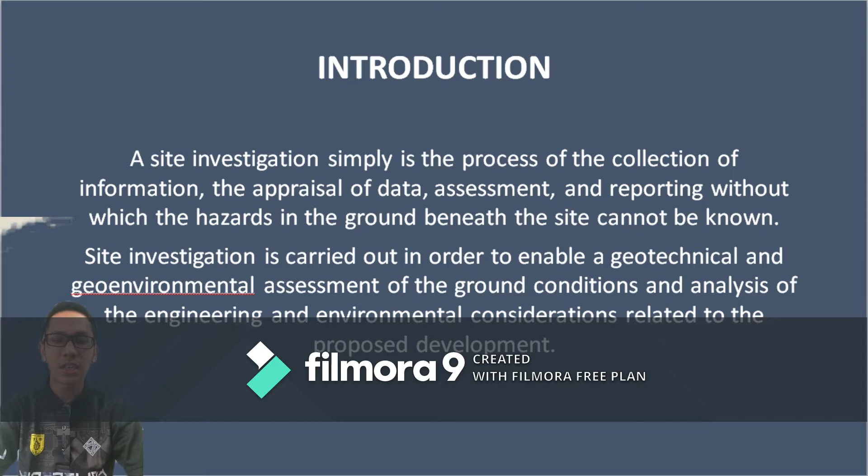Next, the objectives of site investigation: first, to know about the order of occurrence of soil and rock strata.

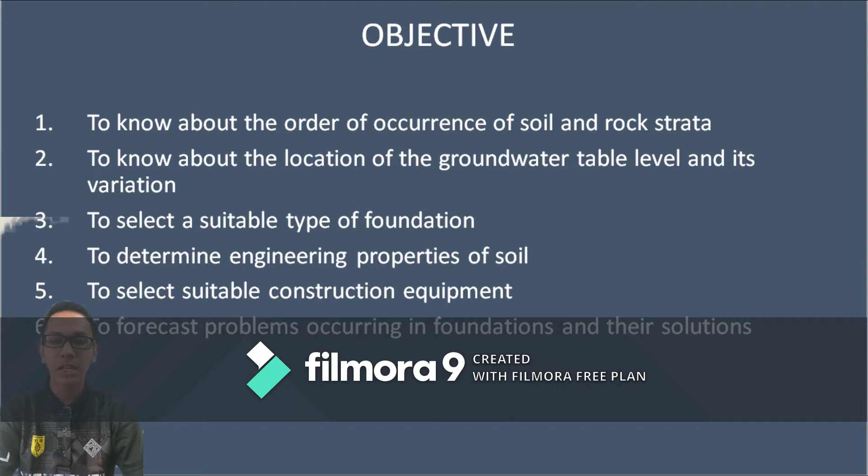I will present about work procedure. Number 1 is the desk study stage.

The methods involved are the collection and analysis of existing information data such as geological maps and land surveys, mining records, mains records, meteorological reports, groundwater records, area plan records, land survey records of nearby areas, and so on. That's for number 1.

Number 2 is site reconnaissance, also known as site inspection. It is a preliminary investigation on site and in the environment to find out in general the condition of the site.

The important information that needs to be known at this stage is the condition of the contour surface of the site, whether it is flat, sloped, and so on. This allows the estimate of the earthworks involved to be known, as well as the type of surface soil and its condition, whether there are cracks in the soil, holes, and so on, to allow us to know the soil problems that exist.

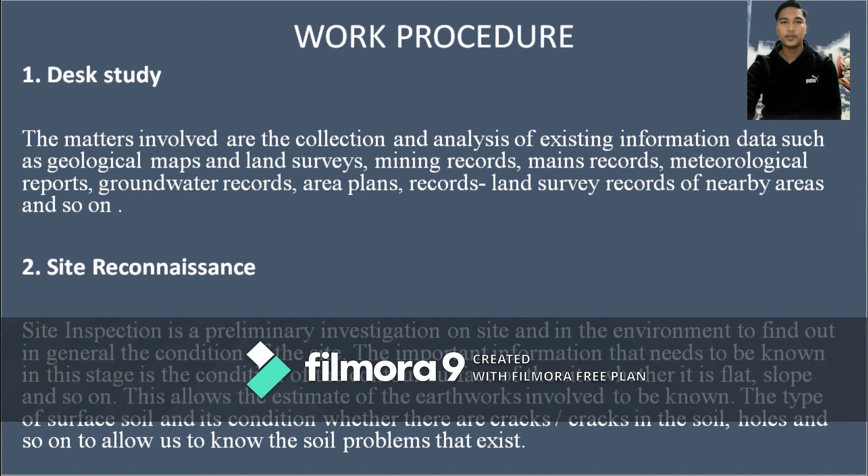Number 3 is spatial and detailed study. Detailed inspection and study is the stage where all the general data obtained at the external study site and site inspection are reviewed in detail for the purpose of design and construction of the project.

The things involved in this stage are topographical surveys, hydrographic surveys, and soil investigation. And last, for the work procedure, is field test or in-situ test.

Tests carried out on the site either prior to or during the construction process. Ground tests such as shear vane, standard penetration, cone penetration, plate bearing, pressuremeter, and structure loading tests such as tests on piles, proof loading, and displacement observation.

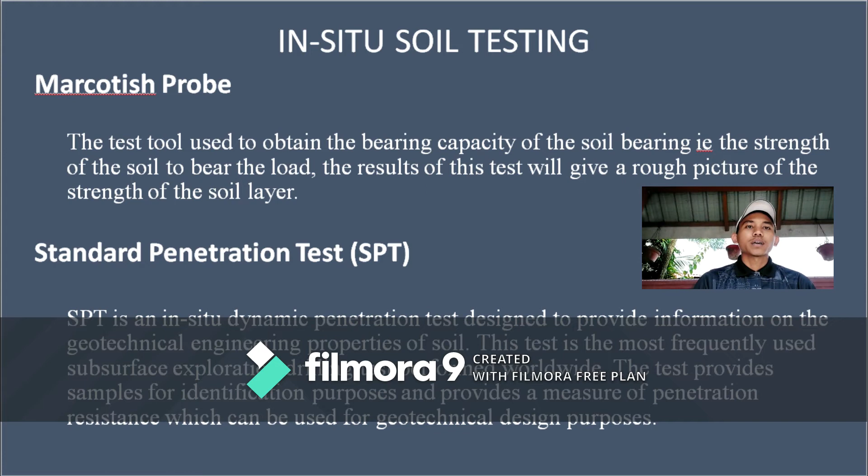Okay, and the third point is cone penetration test or CPT.

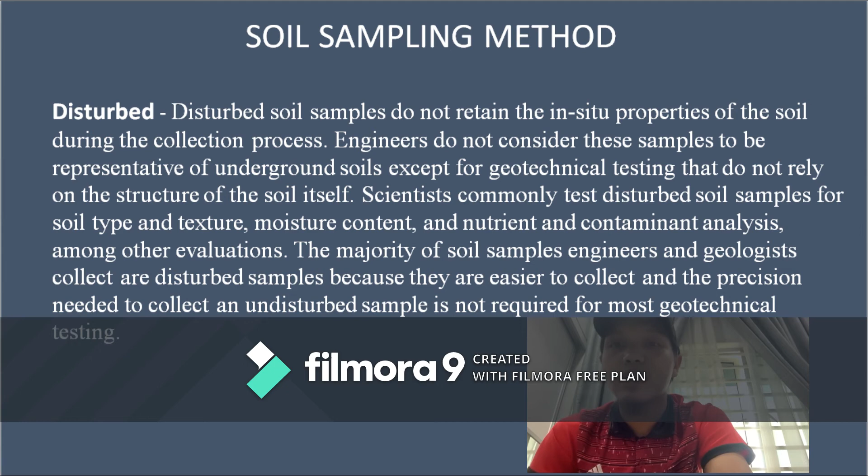Undisturbed soil samples retain the structural integrity of the soil and have a high recovery rate within the sampler. Collecting a perfectly undisturbed sample is difficult and the samplers may contain a small portion of disturbed soil at the top and bottom of the sample length.

Undisturbed samples allow an engineer to determine the geotechnical properties of strength, permeability, compressibility and fracture pattern among others. Results of this analysis are instrumental in the design of a new building.

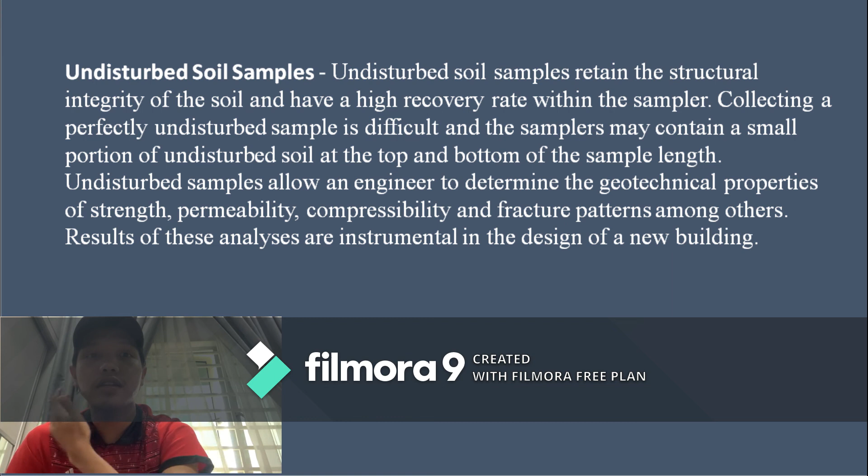In conclusion, site investigation is an important aspect of a construction project. It is a precautionary measure in projects carried out. This is to prevent the occurrence of cracked walls, broken floors, and other accidents.

Site investigation is to obtain information on the condition of the soil and identify any difficulties during construction and how to solve them.